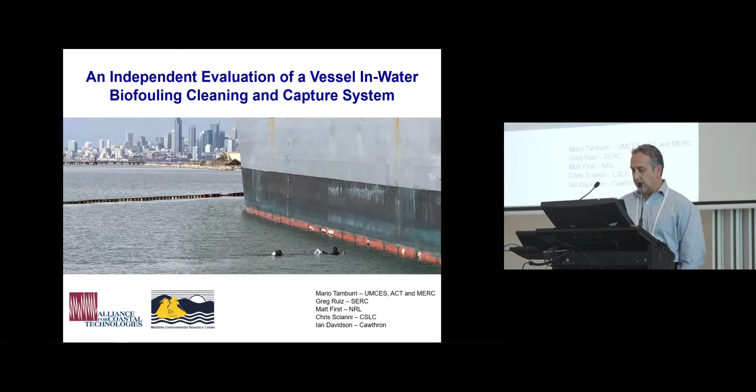So just for some quick background, but we've heard about all this stuff the last few days. The way I kind of think about the issue of vessel biofouling is from two perspectives, right? One side is the vessel operational issues, and of course we've heard all about how biofouling increases roughness and drag and fuel consumption and air emissions and so on. And it's not just the outer surface of the vessels. There's the inner piping systems and the like.

And so the way that the shipping industry has been tackling that operational problem is through a whole husbandry approach that includes anti-fouling coatings, whether they're biocidal or non-stick fouling release type coatings, and in-water cleaning. And in-water cleaning can be traditional divers with brushes and scrapers all the way to these new innovations we're talking about today.

When you think about it from the other side, though, there's, of course, a biosecurity issue around vessel biofouling. I put this one graph up, not for everybody to try to see what those numbers look like, but this is just one of the examples that illustrates how important biofouling is as a vector for invasive species. This is some work by Greg Ruiz, one of our partners on this effort, and it shows that when you compare it to other vectors, biofouling appears to be the most important, even compared to ballast water and other ways these organisms move around the world.

So because of that problem, we've been hearing a lot about these regulations that are evolving and how over the past few years this has really picked up some momentum. These are important regulations. We do need to protect the environment and prevent invasive species. But to make these rules successful, we are relying on new innovations to help solve the problem.

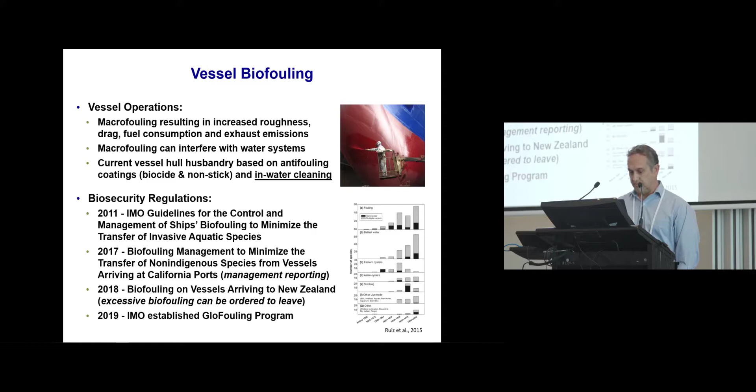So when it comes to in-water cleaning technologies or approaches, there's a continuum of different types, and I think Chris will be talking a little bit more about this in a little while, so I won't go in too much depth on this. But on one end of the spectrum, you can have in-water cleaning to remove biofouling, a clean and capture approach. And on the other end of the spectrum, you can have a proactive, preventive way of dealing with it by periodically removing biofilms that will then in turn minimize macrofouling growth.

And a couple of these cartoons are taken from Chris and Eugene's paper that illustrate that. That top one is what you would call maybe a clean and capture type system where you have a cleaning unit, and in this case a diver-driven unit.

It mows the lawn, if you will, of macrofouling. That material is captured, brought to shore or to a barge. It's treated, usually filtration, and waste is removed and disposed of, and clean water goes back to the environment. So that's sort of one end. The other end would be just a cleaning unit that's perhaps robotic by itself, but it will proactively remove slime

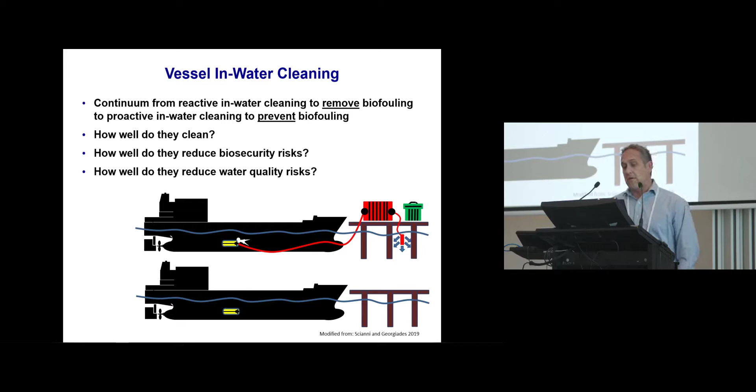layers from the ship. What we're trying to do is ask three fundamental questions about these types of systems. One is how well do they clean? The other is how well do they reduce the biosecurity risks? And how well do they reduce the water quality risks? A lot of our protocols are based on those fundamental questions, and also in large part on the initial work done by Morrisey et al. in the paper in 2015, I believe.

But what we're able to do is we have a couple of programs that have been working on independent testing of technologies over the years. One is called the Alliance for Coastal Technologies, or ACT. It's been around for about 20 years, and we focus a lot on things like sensors and sensor platforms for studying and monitoring aquatic environments.

I have another program called the Maritime Environmental Resource Center, or MERC. It has a similar structure, but it's been mostly focused on green ship, green port technologies. We've been heavily involved in the ballast water management system world, testing the systems for certification by the U.S. Coast Guard and other administrations. So with the expertise of those two independent testing organizations and a variety of partners you see listed there in the logos, we put together this team to tackle independent testing of in-water cleaning systems.

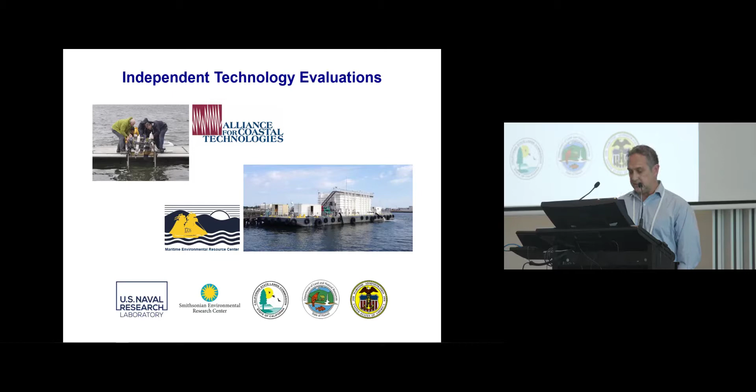About 2 years ago or so we released a public call. It was right after, I think, the meeting here a couple years ago. We asked for anybody who's developing or operating an in-water cleaning system that would like to participate free of charge in water cleaning testing through our programs. We're not charging any of the vendors for this activity. However, of course, there is a cost associated with participating, getting your gear and your people around, and so on. We actually got 8 different applications by 7 different companies shown here.

We ended up working for our first set of tests, which I'll show you today, with the SGS Whale Shark, and that's that picture there next to the Cape Orlando in Alameda, California, with their gear set up and our testing system set up. So the data and conclusions we draw are from that set of tests. We are trying to move forward on a series of tests looking at more of the proactive prevention approaches, often referred to as grooming, with a couple of different companies. We were hoping to get off the ground earlier this year, but I think we'll be able to do some of that testing very soon.

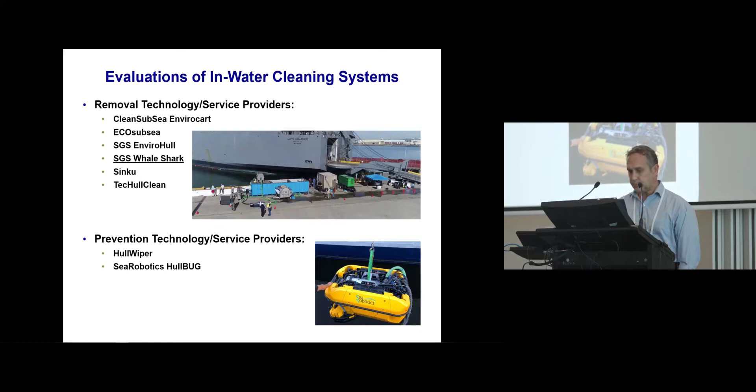So this is just a very simplified graph of the detailed protocol. I don't have time to go into all the details, but our protocols are publicly available. They were vetted by a technical advisory committee. We worked with individual vendors on their suggestions and so on. But in gross overview, we have a protocol that looks at the biofouling removal efficacy, through a series of dives on control and treated sites on vessels.

We had 2 different vessels for this test. One was the nuclear ship Savannah in Baltimore. That vessel was decommissioned and her coating is about 10 years old. She was very heavily fouled and a good challenge. The other was the Orlando I showed you earlier in Alameda, California. The dive surveys did a variety of randomized plots in the control and treated areas, on vertical sides and flat bottoms, and there's a quadrat system shown there on how the divers were collecting data.

We collected data both on macrofouling, organisms greater than 5 millimeters or so, and biofilms as well. We did not distinguish between live and dead. We did that intentionally because, first of all, we learned some valuable lessons in the ballast water world when it comes to live, viable and dead and the complications associated with that. But also because on the ship operations side, it doesn't really matter if the barnacle's alive or not. The roughness is the roughness. So we assumed everything, in quotes, was alive, and that's in fact a conservative way to look at this from a biosecurity perspective as well.

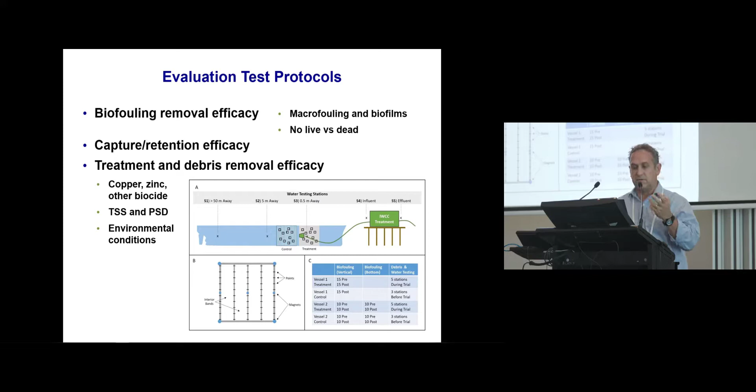But also during the cleaning event itself through a time-integrated continuous sample at those different points shown on the top figure there. So we sampled very far away from the cleaning event continuously, really close to the cleaning activity continuously during the cleaning, and then actually from the cleaning unit itself, which you would suspect to have the highest signal if there was going to be one, before and after their treatment system on shore.

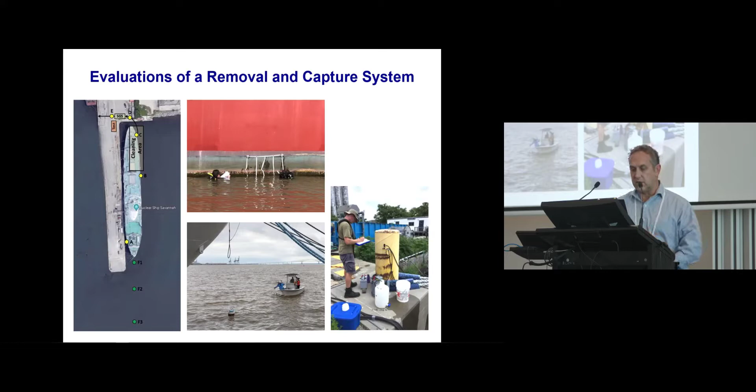So this is the only data slide I'm going to show you today, just to give you a feel for the sort of information we gathered. The full report on this is publicly available, as are the protocols I mentioned earlier, and they're available on our website. Our goal is, again, not to emphasize the performance of one system. It's more to talk about how testing can be done. But these figures show you the biofouling removal efficacy.

The one with just the limited number of bars on the left side is on the Savannah, the first vessel. We weren't able to do the flat bottoms on that vessel as we had planned. The other one is for the Orlando, where we have flat bottoms and vertical sides. The bottom line here is that the control areas stayed fouled. They were fouled and they stayed fouled. The treated areas were cleaned dramatically. The removal rate was quite high.

The pictures below are just a shot of the Orlando before the cleaning event and a similar location on the ship after the cleaning event. So you can see how much material was removed.

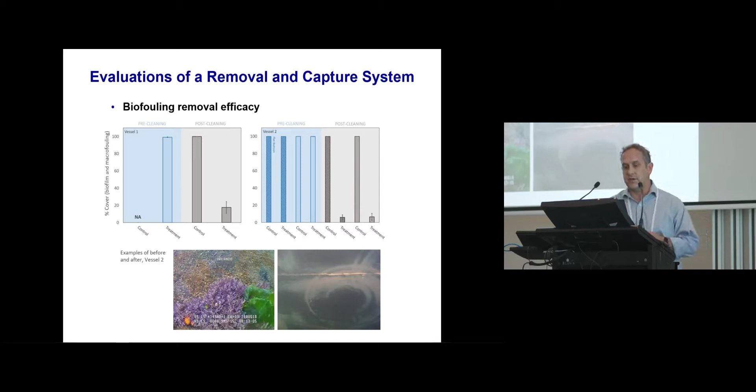So after this set of tests, and we have a lot of information on the copper levels and all those sorts of things, what we decided to do is bring together a bunch of our colleagues and experts around the world to look over the results, discuss some of the lessons learned from that first set of trials, and to think about where we should go in standardizing or harmonizing testing of these systems. It's a complex issue. There's a few of us around the world trying to do this sort of work, and we're all going to benefit by trying to do this in a standardized, similar way as much as possible.

So we had 24 folks from around the world. We went to lovely Honolulu in April. It was a very nice workshop. You can see some of the folks there, and some of you can see yourselves in the picture in the room today.

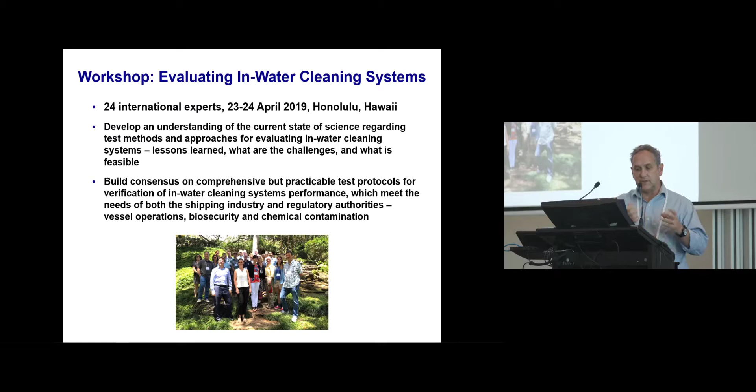Our goals were to develop an understanding about the current state of the science around testing these systems, and to, again, look at our lessons learned from that first set of trials, what are the challenges and what's feasible. And ultimately, what we wanted to get out of this is to help build some consensus on how we do a rigorous, comprehensive, scientifically sound, transparent set of tests on these systems that will help them mature, help them move into operations, and help address the needs of industry and biosecurity and water quality.

So what I'm going to talk about in the last few minutes is just some of those recommendations and lessons learned moving forward. First, the good news. We all concluded that, yes, in fact, you can do this. There's nothing there that's insurmountable.

So rigorous independent testing and standardized evaluations is very much something that we can all do. And that's good, so we can put some hard numbers and some good science behind the performance of these systems. We agreed that standardized protocols are going to be important, and this is really important in the future when we start thinking about certifications or approvals or acceptance of these sorts of systems. You need to be able to compare how they worked, and these systems shouldn't need to be tested in every location around the world. So the standardization is important.

What we also concluded from these first rounds of tests is that the current systems we tested are in general doing a pretty good job at the operational needs of the vessel, and that is removing the macrofouling. When it comes to other issues like water quality, they probably need some maturation there. If you look at the report of this one system we tested, the copper levels on discharge were relatively high. They've since made adjustments to their system to address that with media that removes metals. But they're learning, as we all are, as we go forward in this area.

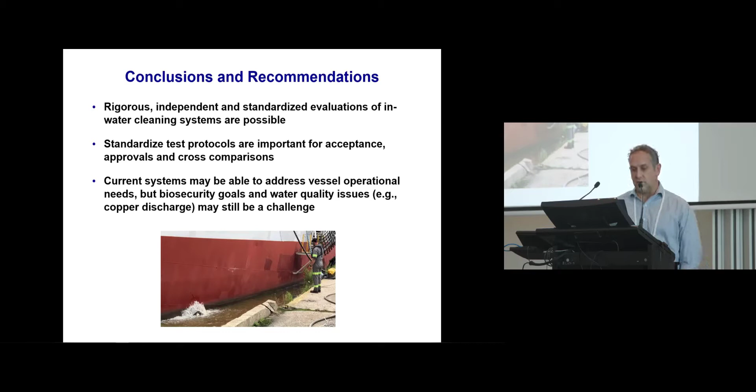Another thing that was clear is that the systems that are evolving now are really driven by the operational needs of the ships. So they're really focused on the main hull surface of the vessels to reduce drag. There's not a lot of attention at this point on the niche areas, and as we all know from the biosecurity side, those are probably the hot spots. It's not that these systems can't be adapted for that. It's not that it's technologically impossible. It's just there's really no market for that right now. However, as regulations around biosecurity and fouling start evolving, I think they'll quickly adapt to address that as well. So our test didn't look at niche areas because the vendor said they don't do niche areas.

Another thing we talked about is a need for uniform terminology around these systems. I'm not going to address that at all now. I'll hand it off to Chris for later because it's complicated, but maybe he has a solution for us.

We also didn't look explicitly at impacts to the coatings or to internal piping systems and water systems of the ships, which of course can be fouled as well. This evaluation didn't include either of those two aspects. Fortunately, there are other groups looking at those. We were able to document visual observations of scuff marks and so on on the vessel from a cleaning event, but the true impacts to coatings need to be addressed in a more formalized and explicit way, and maybe Eric's talk this afternoon will address some of that as well.

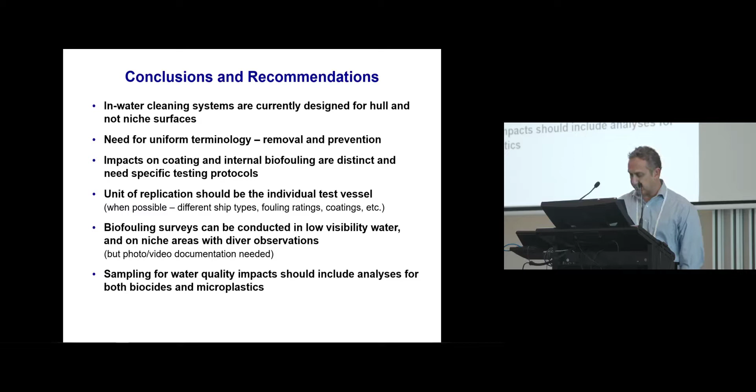So I mentioned the different variables that are important when it comes to operating in-water cleaning systems as well as testing these different systems. And this is something we spent some time with at the workshop. There's lots of different things that can have an impact, from the vessel operation size, the type of vessel, the age of the coatings, the fouling that's already there. All that will make a difference on how the in-water cleaning operates and how we run the tests.

Environment's the same way. Currents, water clarity, wind, background levels of different biocides, all that sort of stuff will have an impact on how the tests are run and how the system performs. The in-water cleaning systems themselves can be configured in lots of different ways under different situations: what types of brushes or water jets, how they operate it. Do they do a single pass, double pass, overlaps? All that stuff makes a difference.

The operators themselves, there's some variability. If it's an ROV pilot or a diver, how experienced are they, right? All that has an impact. Now, we're not going to capture all that variability in a reasonable set of tests, but we need to keep all of that in mind when we're looking at these and evaluating these systems, and try to capture as much of that variability as possible.

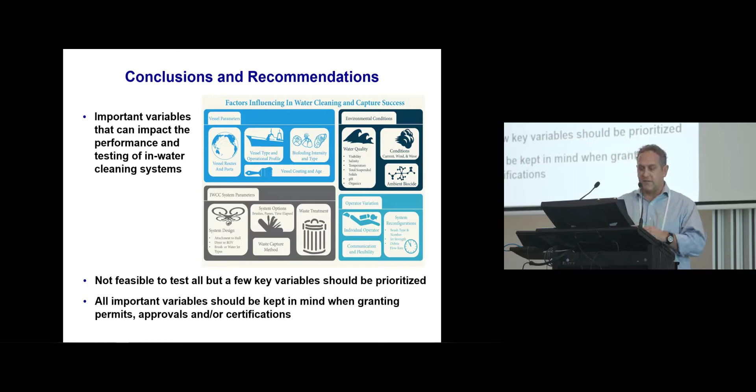We're trying to get our in-water cleaning prevention proactive approach testing done sometime soon. And that's, again, looking at removal of that soft biofilm to prevent macrofouling growth. The issue with that sort of test is that, unlike in-water cleaning capture, where you can do it before and after, when you're looking at those prevention systems, you need to follow that vessel through time, right? So if it proactively grooms the vessel every 3 weeks, you need to follow that ship for 9 months to a year to see if there's a difference in macrofouling growth.

One thing I hope we can get started on next year is looking at these same sorts of tests when it comes to the traditional diver manual sort of biofouling removal. This is happening everywhere now. It's happening all over the world. I was told by a ship operator that 95% of the world's fleets is cleaned by these sort of manual approaches that really don't look at capture very much.

If we're going to evaluate these new innovations that do all this fancy stuff, including capture, we should have a look at what we're doing now and see how they compare when it comes to things like environmental safety and biosecurity.